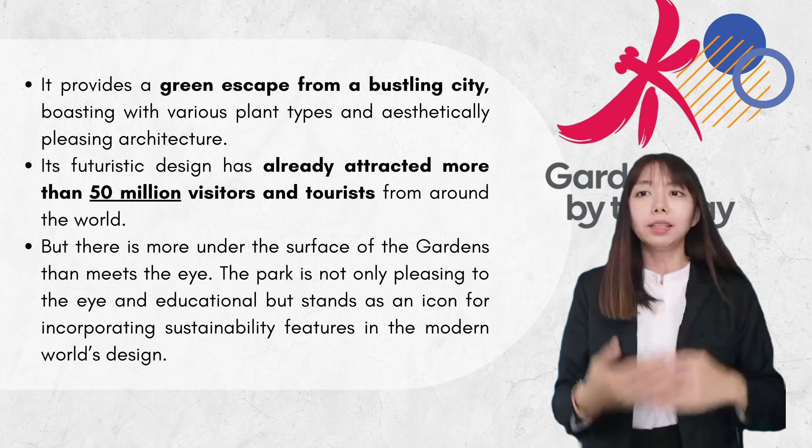Not only does it please the eye with its gardens, the government also wanted it to stand as an icon for Singapore by incorporating sustainability features into the modern world design.

Now I want to share the 4 popular destinations in Gardens by the Bay: the gigantic domes, the colossal super trees, green gardens and grassy lakes, and the sweeping lawns. These 4 are what make the sustainability of Gardens by the Bay, and they make it a very popular destination now for Singapore.

Next, we're going to look into the gigantic domes, one of the largest of the 3 zones at Gardens by the Bay. It's in Bay South, which is home to a collection of truly enchanting attractions, including 2 gigantic domes, each with a very unique role within their glass walls.

Inside the domes is the Flower Dome, which is the world's largest air-conditioned greenhouse. Visitors take a winding path through extensive plant collections, meaning that inside the domes are different species of plants and flowers for tourists to look forward to.

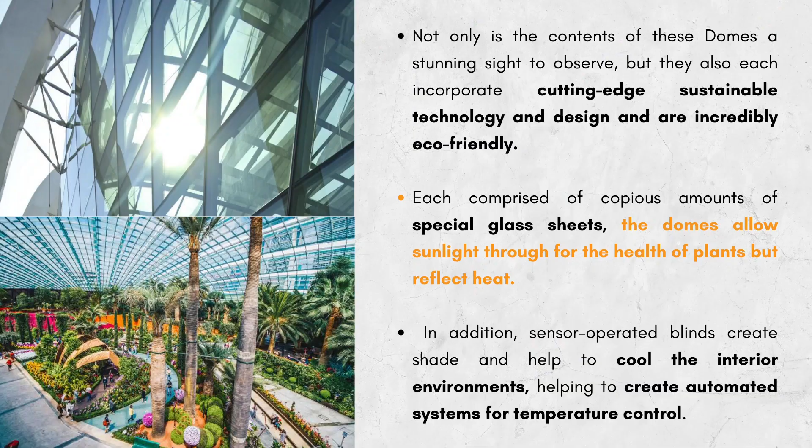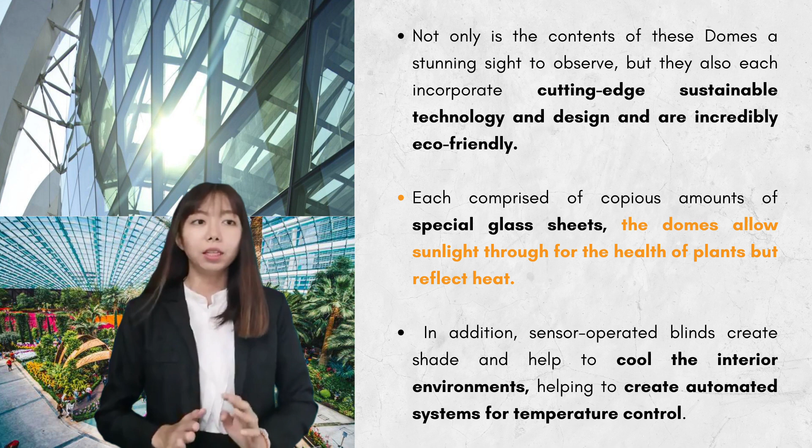Looking into the insides of the domes, they have a very special, unique architecture with cutting-edge, sustainable technology and eco-friendly designs. Each of the domes is comprised of copious amounts of special glass sheets that allow sunlight through to help the plants, but reflect heat. In addition, inside the domes they have created shades to help cool the interior environment, creating an automated system for temperature control.

This is the map layout of the flower domes, one of the domes in the Gardens by the Bay. The flower dome is equivalent to 75 Olympic sized swimming pools, with around 3,000 plus glass panels, and the temperature inside ranges from 23 to 25 degrees. It's a very cooling place for tourists to visit, and it can accommodate up to 1,000 people. There are different layouts of plants inside, including the Mediterranean garden, the flower field, Australian gardens, and many more.

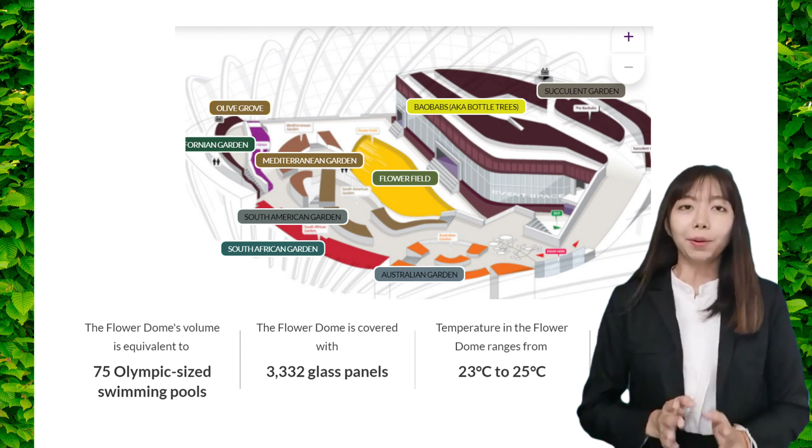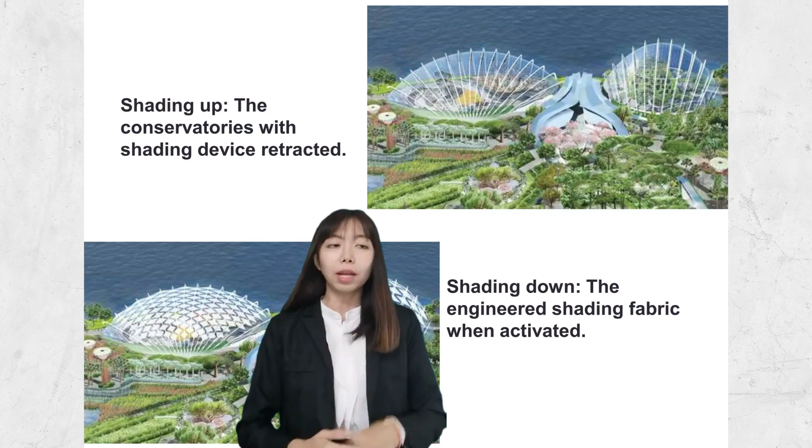This is one of the very unique shades of the glass panels we mentioned. When the shades are not in use, they will be shading up, with the conservatory's shading device retracted. When there is a huge amount of sunlight, the shades will be shading down, with engineered shading fabrics activated to prevent heat from coming into the glass panels.

There are two main sustainable functions in the glass domes. The first is to minimize solar heat gain. The glass domes are fitted with glass that has a special coating allowing optimal light in for plants, providing shade when it gets too hot. Secondly, they want to cool only the occupied zones, using a strategy of cooling only the lower levels, thus reducing the volume of air to be cooled. This is achieved through displacement cooling, which is ground cooling, so the warm air rises and is vented out at high levels.

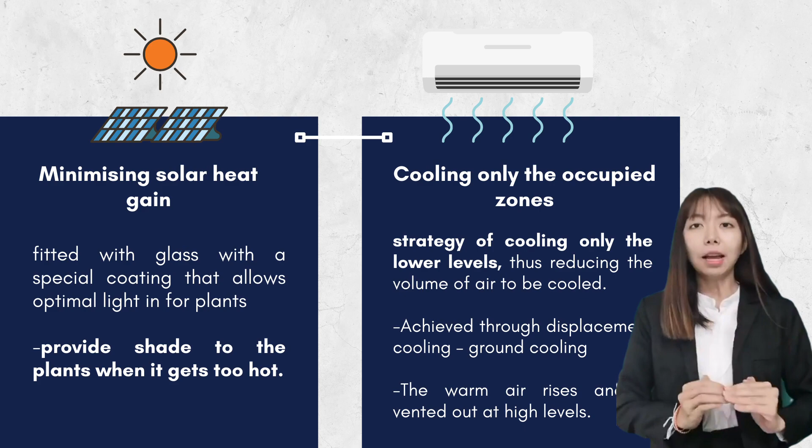Moving on to the second feature, the super trees. There are 18 super trees that act as vertical gardens generating solar power inside the Gardens by the Bay. The super trees act as air venting ducts for nearby conservatories and collect rainwater. To generate electricity, 11 of the super trees are fitted with a solar photovoltaic system that converts sunlight into energy, which provides lighting and aids water technology within the conservatories below.

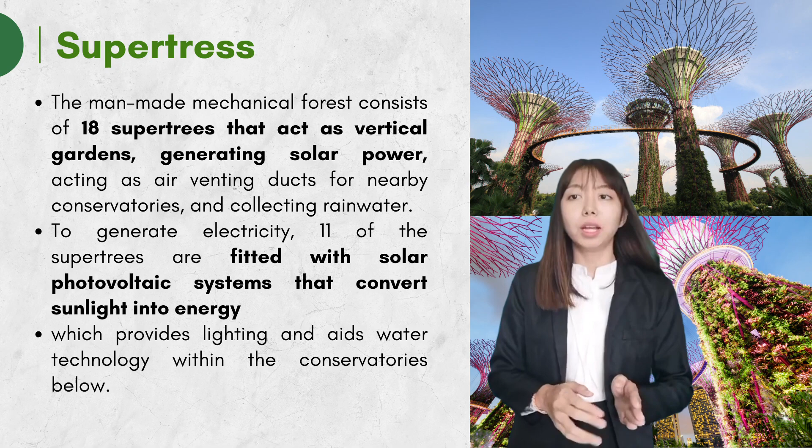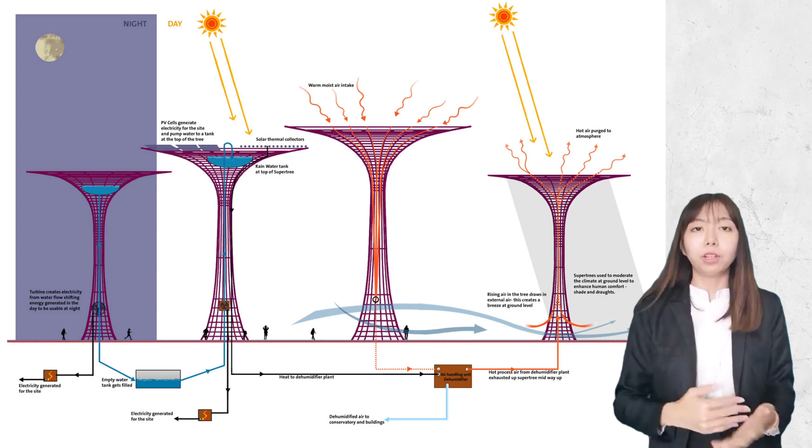These photos show the architecture of the super trees. On the right hand side, they act as shade for tourists to rest under. On the left hand side, at night time, rainwater is stored on the upper side of the super trees, and during the daytime, when sunlight hits them, it generates solar energy for electricity. The super trees have solar panels on their canopies with photovoltaic cells that convert solar energy for lighting up the super trees, making it a very sustainable way of preserving energy.

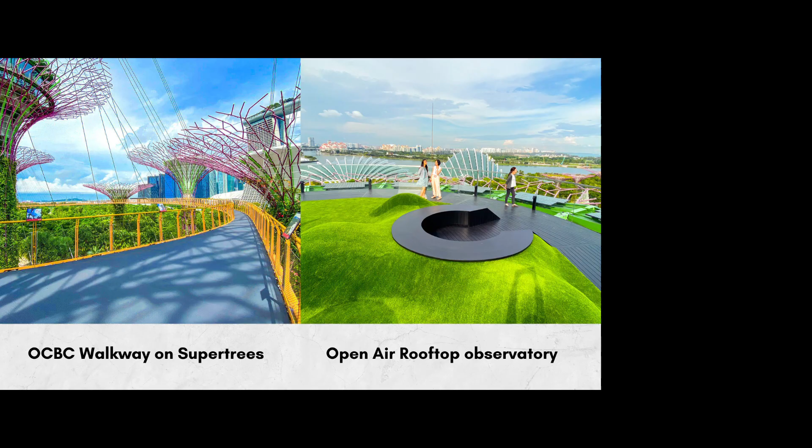There are two special unique points on the super trees. The first is the OCBC walkway on the Supertrees, where tourists can go up and see the scenery of Singapore.

The second one is the newly launched open air rooftop observatory, where tourists can also go up and enjoy the view. On the upper side, you can see a rectangle square - that's where the solar panels are turned into electricity for the super trees.

And the last one, we're going to look into the Dragonfly and Kingfisher Lakes, which is also one of the destinations in the Gardens by the Bay. This is where the lakes are located, in the Bay South of the Gardens by the Bay, near Marina Bay Sands.

The Garden Lake system functions as a key ecological process and a living system for fish and aquatic species. The lakes act as a natural filtration system for water from the garden's catchment and provide aquatic habitats for biodiversity such as fish and dragonflies.

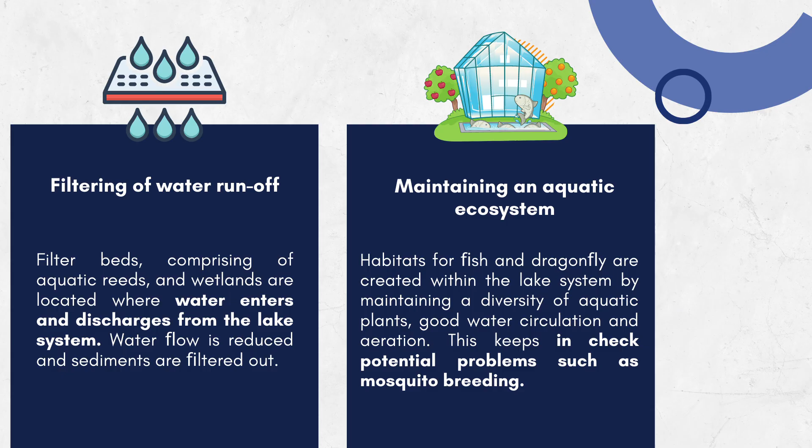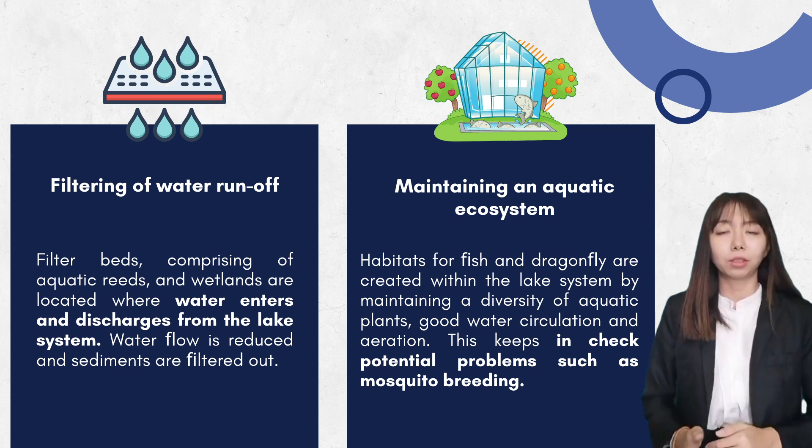There are two functions of the lakes. First, they filter water runoff - water enters and discharges from the lake system, the water flow is reduced, and sediments are filtered out. Second, the lakes maintain an aquatic ecosystem, creating habitats for fish and dragonflies in the lake system, which also keeps in check potential problems such as mosquito breeding, preventing mosquitoes from breeding inside.

So last but not least, how can Malaysia learn about sustainability? Malaysia can adopt green technology like 3D accurate temperature monitoring that can help businesses distribute airflow according to needs, just like the domes we saw, which turn heat into air conditioning using sustainable energy.

The second one is Malaysia can try to build and adapt a self-healing network with smart technologies. This way, businesses in Malaysia are able to realize optimization, energy conservation, and consumption reduction. It might take a few years for Malaysia to reduce CO2 emissions, but with greener technology being adapted by more businesses in the country, it's possible we can see positive outcomes in no time.

So moving on, we are going to move into the Q&A session for today's topic.

What are the main 3 points that Singapore does to let society implement sustainable practices? The first one is Singapore has a lot of programs encouraging the 3 R's - reduce, reuse and recycle. Singapore has also raised environmental awareness through educating youngsters and reaching out to community groups.